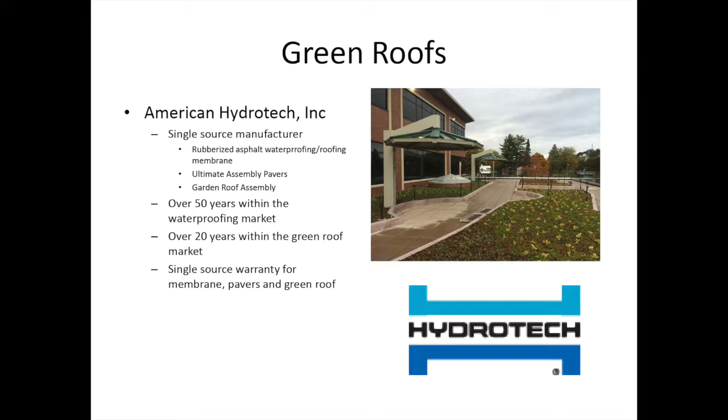Here are some organizations I'm affiliated with. This is who I used to work for, and I still work with them and represent their products because I feel they're top of the line. It's called American Hydrotech. They do waterproofing and roofing, and they've been doing waterproofing for 50 years and green roofs for over 20. I really like this system, these rainwater hogs.

It's a rain barrel, but it's sleeker and more resilient to the elements than just a plastic 55-gallon barrel you'll see. These are really sleek, you can hide them under decks, they don't take up very much room, and they hold 51 gallons. They're pretty cool—I'm going to be putting these on my house in the spring.

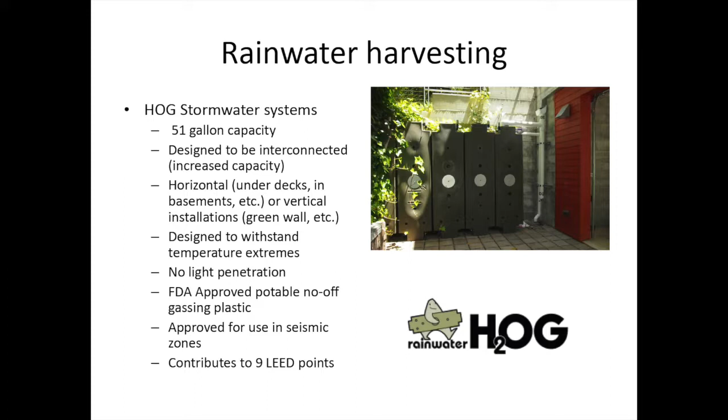We also do rain gardens. This is some images from two that we built this last summer in Traverse City near Kids Creek. We worked with the Traverse City Watershed group down there.

These are two large ones. The first one was at the Grand Traverse Commons site, and it had partially contaminated soils, so they didn't want water infiltrating through there. We actually had to put a membrane down underneath it, so it's more of a pond than a rain garden, but it's functioning as a rain garden—it just does not let the water infiltrate.

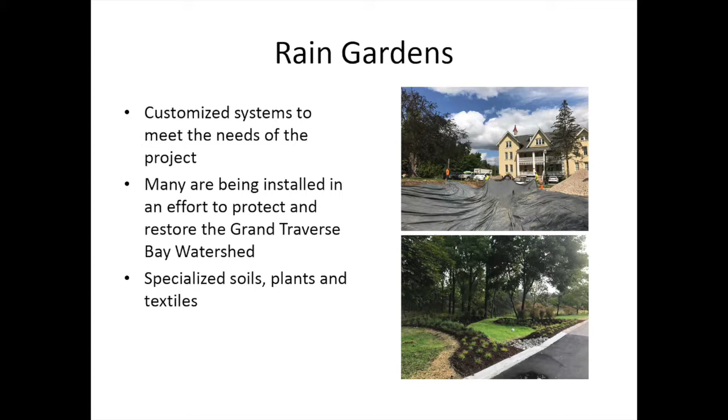The one on the bottom is at another building nearby, same watershed. Overall, a lot of the green roofs happening on Munson's campus and these rain gardens are all protecting Kids Creek, which is a main tributary to West Bay.

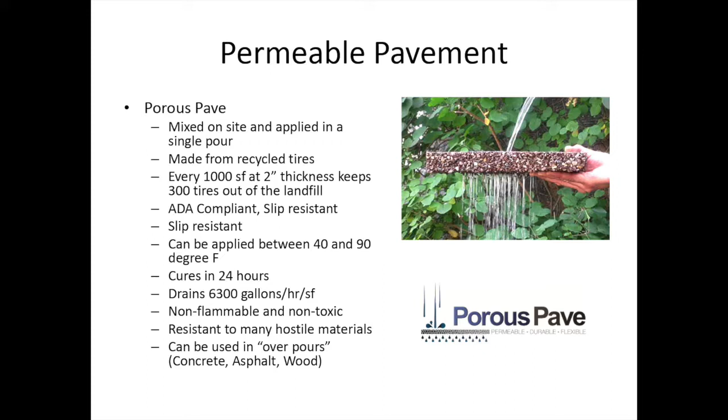Permeable pavement is another thing we get into. This company here is pretty cool—their systems are actually partially made out of recycled tires. Every 1,000 square feet of this product takes 300 tires out of the landfill. You can use this to move water through the system, and again, we're looking at the holistic approach to the roof, or to the site, of managing water.

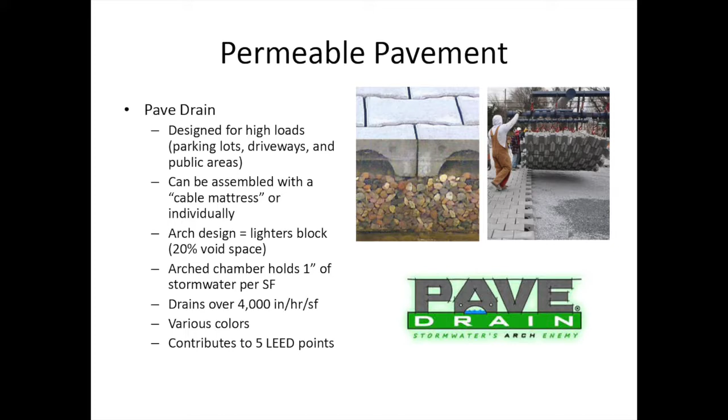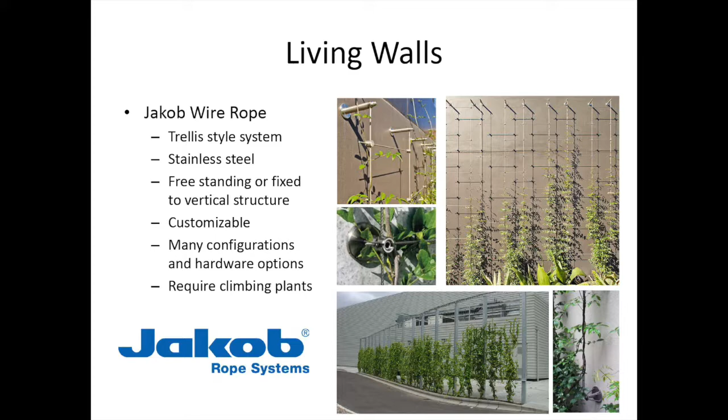Another more heavy-duty system is called pave drain. There are different types of living walls. This one is a trellis system where vines grow up it, and the plants are actually in the soil and the ground. The main difference between that and these is that the soil, or growing media, is actually in the walls for most of these. These are structural walls that would replace your typical concrete block wall—another form of green infrastructure.

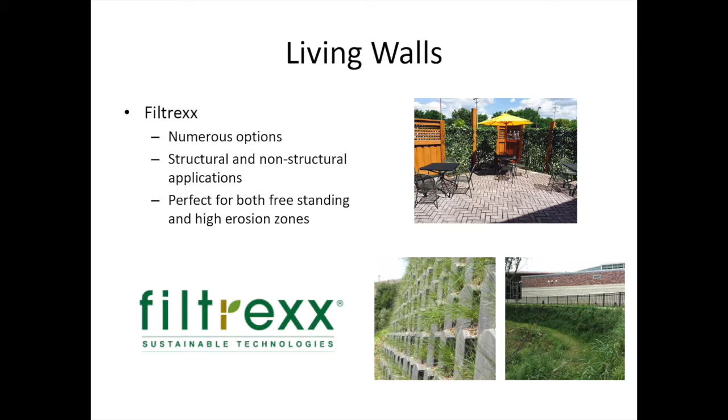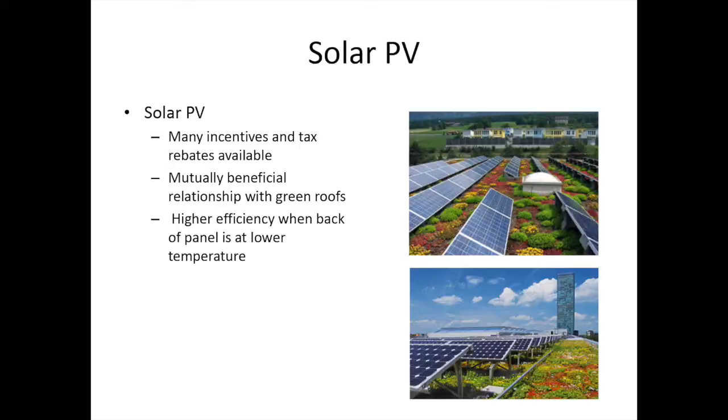We also consult on solar PV. You can see these here—these aren't our jobs, but they're from Germany. There are tests out of Germany and the United States showing solar panels actually producing at higher efficiency when paired with green roofs, because the evaporative cooling effect of the plants cools the back of the solar panel and makes it more efficient. So it's a symbiotic relationship between the two, and overall a good double use of your site.

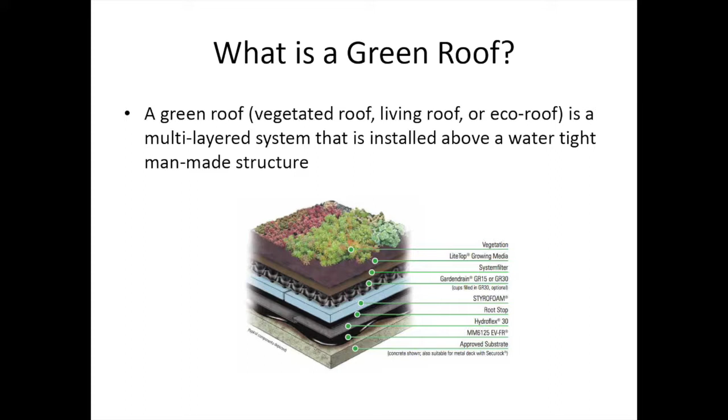So what is a green roof? This is the official, technical definition: a green roof is a vegetated, living, or eco roof, and it is a multi-layered system that is installed above a watertight man-made structure—so basically over waterproofing, and there are many layers that you need to consider.

I'll have this up here so anyone who wants to come look at it after the lights are back on can do so. But basically, the bottom layer is your roof deck. That can be concrete or it can be wood—that's your roof.

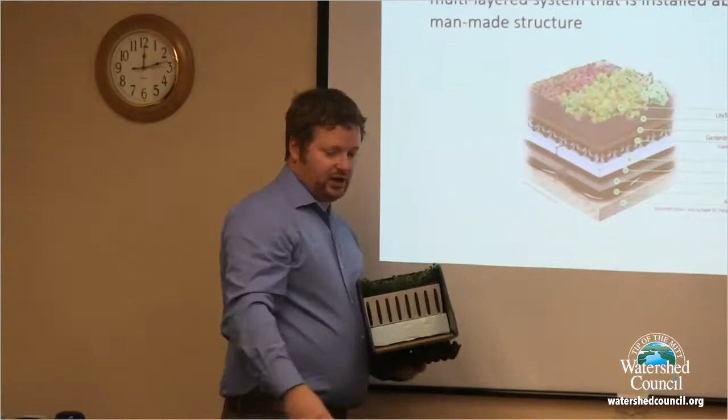And then you have your waterproofing layers, a root barrier, insulation, your drainage board, which is here - this is going to hold water as well as drain water. And then you have a fabric that keeps all of your soil from washing away, and then your plants on top. So it's a lot of layers, but it's all there to mimic the functioning of what you'd get out of the first few feet of soil at grade.

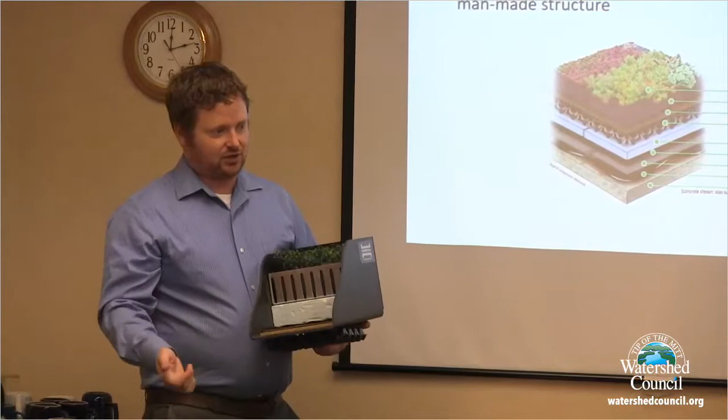It's going to drain, retain water, and support plant and root growth with various pore spaces. There's air within that soil, so the plants and roots can breathe, and it's a really healthy environment. It's an engineered environment, but you're on top of a building, so it has to be engineered to do that. I'll keep this up here, and feel free, we can pull it all apart and check it out afterwards.

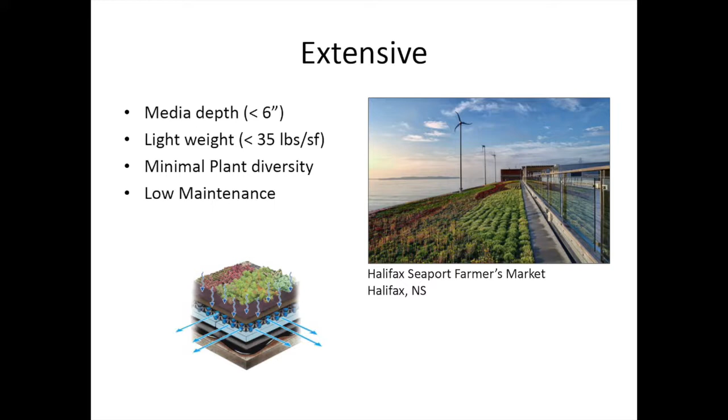So there's different types of green roofs. This one here is known as extensive - it's a shallower roof. There's two main types of green roofs: extensive and intensive. How I always remember that is intensive, it's heavier, so think of more intensive weight, and that's a deeper system. But this one here is a lighter weight system.

It's less than 6 inches of soil or growing media depth. It weighs less than 35 pounds per square foot typically. The plant diversity is minimal, because the root systems of the plants are shallow. So you can't plant a big ornamental grass in 6 inches and expect it to live, because its roots have nowhere to go. That's where you're cutting off the diversity of plants, to anything that can survive in 6 or less inches of soil.

There's a lot there, but it is a more limited palette. It's going to be lower maintenance because of that limited plant palette. You don't have a lot of diversity there, but it is the workhorse of the green roof industry - a big sponge up on the roof managing stormwater, which is one of the number one reasons these things are used.

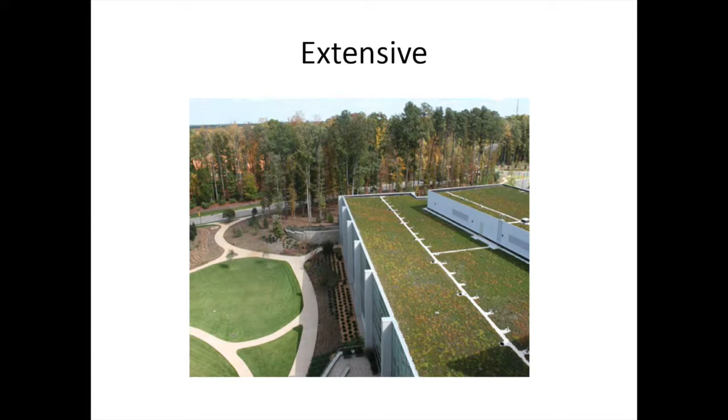This is a large campus, and this is only a fraction of that project. This one's in Cary, North Carolina. They wanted to make sure they had zero runoff from their site, so they're managing anywhere from 40 to 60% of every rainfall on the roof before it even leaves the roof. That's a huge thing for the civil engineers to take into account when designing the overall infrastructure on site. Many communities actually require you to have them now, and this one did it on their own.

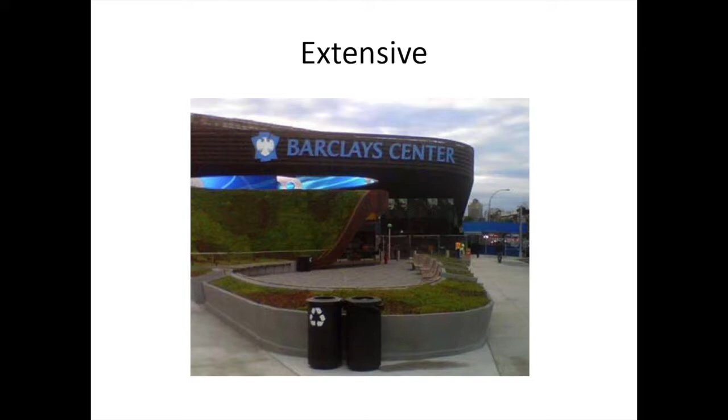This one here is more of an ornamental version of it. This is in Brooklyn, where the Brooklyn Nets play, the Barclays Center. You can see this is an extensive roof on a very steep slope. There's this product here that you can see - it hangs down and holds soil on the rooftop. So you can go at pretty much any angle. This is not something you only need to do on a flat roof. This is a specially engineered system, but it still is extensive, or shallow.

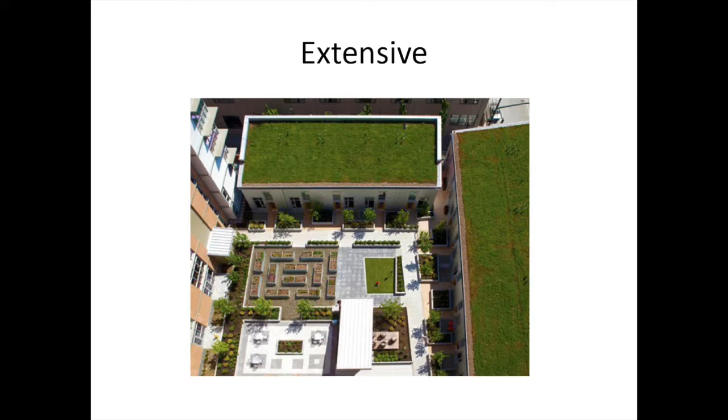Here's one that's another extensive roof up top, intensive down below. This is on maybe the 4th or 7th floor roof of a development - I forget. But this is a project in Portland, and these are all community gardening spaces on the rooftop. This is actually a fire hydrant, and we had to design it so dogs could go up there and use the restroom. We engineered a special soil for where the urine would go down into the waste stream versus into the runoff, and rain barrels collected water they use for the gardening area.

This is a zone that, when this was built, was in a sort of a rougher area - it's Portland, there's not a lot of bad areas, but this was an area where, to get buyers to come in, they needed to provide something special. This is a protected space - a community space, a gathering space, and an otherwise unused rooftop. In the past, there wouldn't have been any interaction with your neighbors at that level.

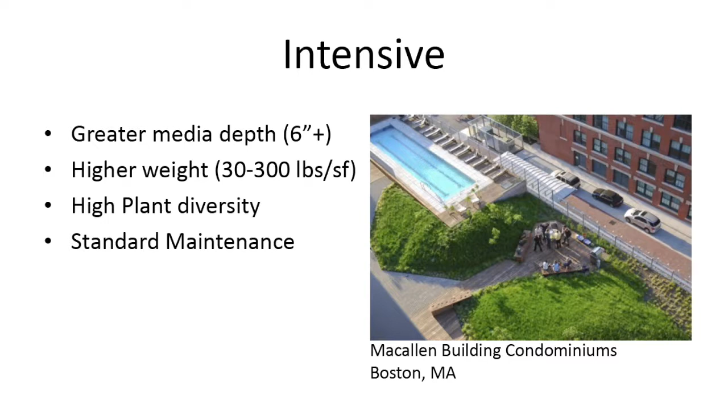This is on the roof again, a lap pool. It's at the same building as the one I showed you in Southie. This is the community space they built on top of their parking garage. They voted to move this into this type of space versus places to park cars - some people don't have cars, so they decided, why not make it a barbecue area and a lap pool and a place you can go outside versus being trapped in your condo all the time.

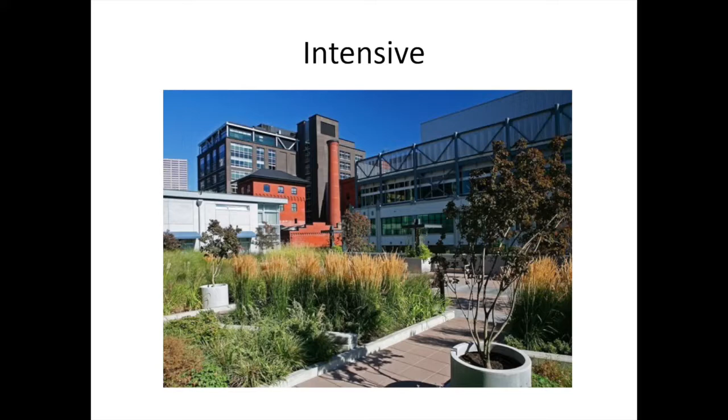So you're going to have a higher diversity of plants and more standard landscape maintenance, similar to what you would have at your home. This here, believe it or not, is the roof. So this is just showing you the diversity of what can happen on the roof with the intensive system.

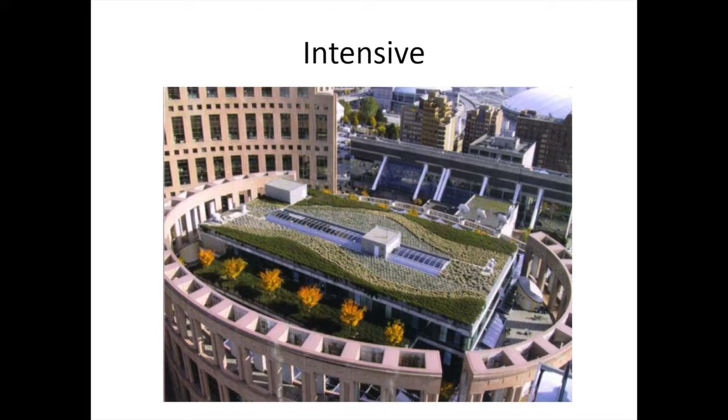This one here is in Vancouver, British Columbia. These are silver maples, and this picture was taken about a decade ago, and now the branches are interwoven - that's how big they are. The trees are huge, and this area right here is about 20,000 square feet, so about a half acre there.

I have a quick question - can you go back one? What about the root systems? How do you prevent the root systems from getting too deep and affecting the structure?

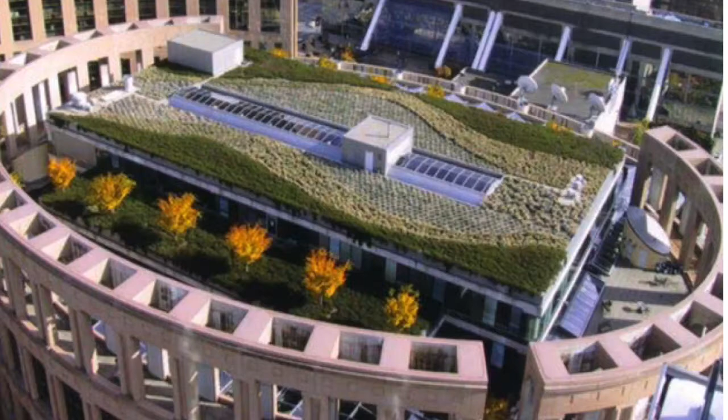Great question, and that's where the root barrier comes in. So you have your waterproofing, and above there you have a root barrier - some type of layer. There are many different types. Most of it's high density polyethylene, or HDPE, and it's tested for up to 2 years typically in a lab for root penetration. Then you put that down over your waterproofing to make sure roots aren't going to go into your waterproofing. Penn State does that testing - they test it against the most aggressive root systems out there, put it in, and see what happens. You have to patiently wait for 2 years, and then you pass the test.

So what are some of those other plants in that? I mean, I see the maples, but these are all different types of grasses.

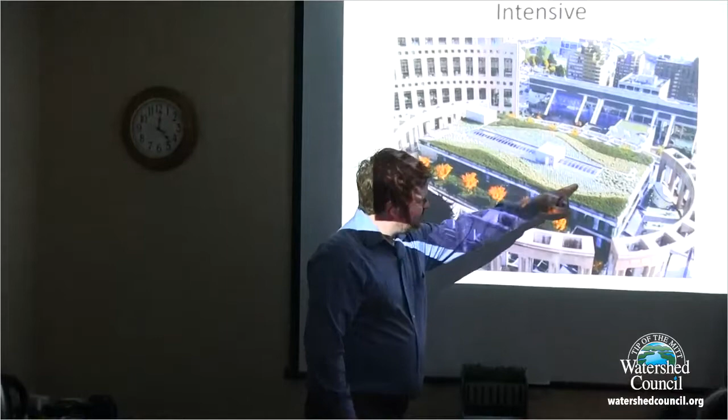I believe this is blue stem right here, and I'm not exactly sure here, but they're all grasses and other types of larger ground cover. I think this is some type of juniper, I believe, I'm not exactly sure, I didn't design this one. This is one I maintained.

I didn't help with the plants on this one. A lot of the prevention also has to do simply with plant selection. You don't select plants that are going to be overly aggressive, like a running bamboo, for instance. You don't use that anywhere.

But clumping bamboo is okay with the right precautions. There is a project though, and again, this is why working with a GRP is important, because some people don't know that.

There was one where we told them, don't use the bamboo. It was a hotel in Philadelphia. Don't use bamboo, we said, but they used it anyway, and within a year the roots had gone through the side of the concrete planter, all the way through it. It was right next to the pool, and it found its way into the pool system and all kinds of stuff. They had to rip it all apart and close the pool in the middle of the summer at a fancy hotel, so it wasn't a very good situation for them.

I'm sorry, I'll back up a little on the technology, I'll pass this around. So this is the garden drain product, and there are various different sizes.

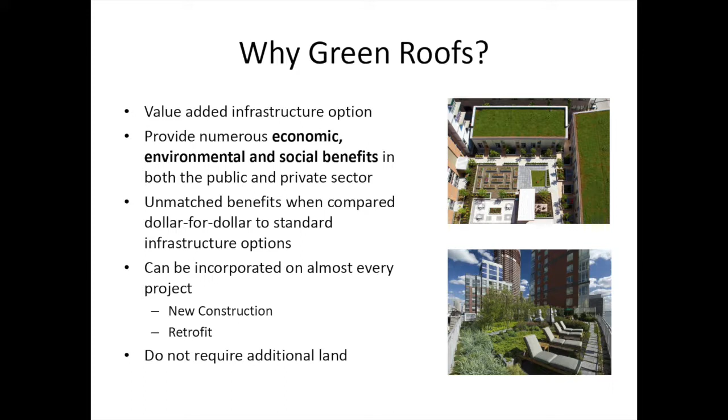There's calculations to show this that can be used in calculating your ROI, or return on investment. You can look at this and ask, what's the benefit of having this break room off of the roof so my employees can go out and have their lunch? What's the productivity you get out of that? There's all kinds of calculations that can be run to help compute that.

Dollar to dollar, when you're comparing it to other infrastructure options - for instance, a pipe underground to take all your stormwater and dump it into the bay - all your dollars are paying for is a pipe to dump water into the bay. But if you put that dollar into a green roof or any other types of green infrastructure, you're getting benefits on multiple sectors in multiple ways for that same expenditure, and it's doing the same thing: managing the water.

It can fit into new and retrofit construction. You can look at a building like this that can barely hold snow load, and you can put more beams up there and figure out whatever needs to happen - retrofits are possible. Sometimes you find projects that are built only 2 stories tall, but they're engineered to hold 10 more stories above them, and you could park a couple semis up there and do whatever you need to do on the roof without having to do anything extra. Some structures are like that.

And they don't require additional land to provide recreational space - that's a huge benefit, a huge reason to use it. Some of the public benefits, things that help your community and your neighbors: they create green collar jobs, a term coined in the industry for educating people to be out there on the ground working on these jobs, doing things that are better for the environment.

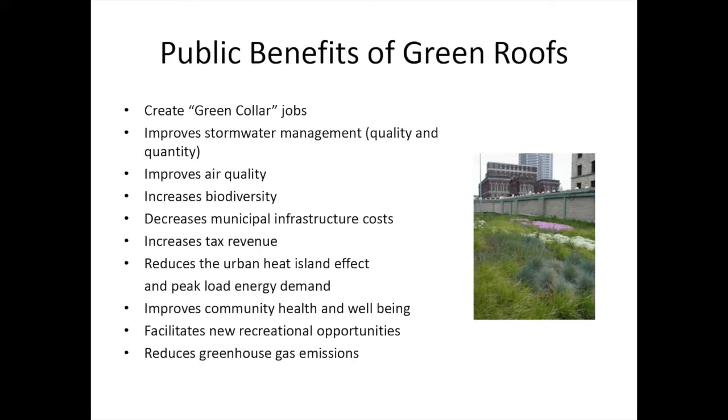The overall municipal infrastructure costs go down in places that are really dense. Even downtown Petoskey, if they have problems with the storm pipe down a certain road because it's 100 years old, if they're maintaining the water on site on a roof, it's not rushing in there and contributing to the potential overflow of the storm system.

Increased tax revenue. These things increase the value of your building, so then the city or the community, the building's worth more money, and that owner is paying higher tax, or that builder or developer can then go out there and sell it for more money. It's about a 10 to 15 percent average, up as high as 25% more per unit in condo developments with this type of infrastructure.

It's going to minimize the urban heat island effect. That's your building heating up and heating the urban area around you. This is reflecting heat or absorbing heat versus it hitting on your membrane and holding there and transferring into your building. You have plants that are evapotranspiring, and I think of it as a force field that's cooling the air around it, and that heat can't get into your building. Even with an insulated roof, you're still going to have some heat transfer holding that membrane in a warmer environment than you would want.

There's new recreational opportunities. You talked about that a little bit, and also it reduces greenhouse gas emissions.

What about snow load? Great question. Snow load is engineered into the structure. So let's say this building, or any building, the engineer has to verify that it can hold the snow. And snow loads have changed in the last 80 years—80 years ago, they didn't exist. Now you do the snow load plus the weight of the green roof. You can't transfer it, you can't say 'I want a green roof instead of a snow load,' because you're still going to get snow. You engineer for snow and the green roof together. Does that answer your question?

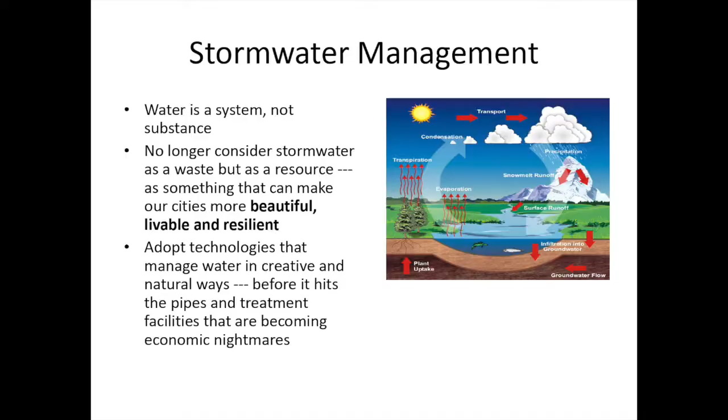Stormwater management: water is a system and not a substance. We're never going to get more water, it's not falling out of the atmosphere—all the water we have on the planet is here now. So it's moving in a cycle, and these are helping replace a surface that used to be permeable.

We're looking at various different technologies to help create these—and I am skipping some stuff because time's short today. So we're restoring nature's ability to capture water where it falls. That's a big thing, and it's capable of substituting or offsetting natural ecosystems.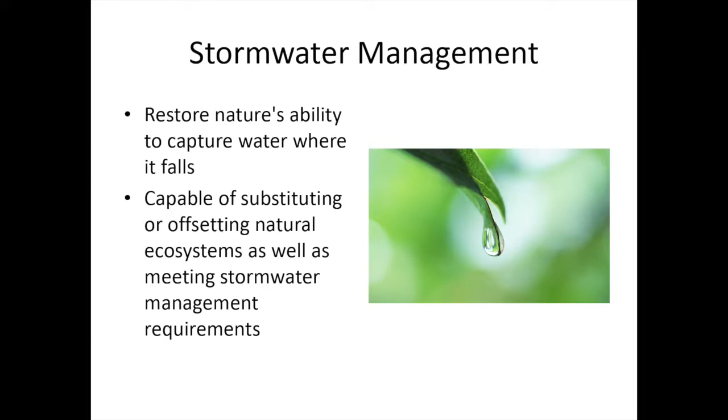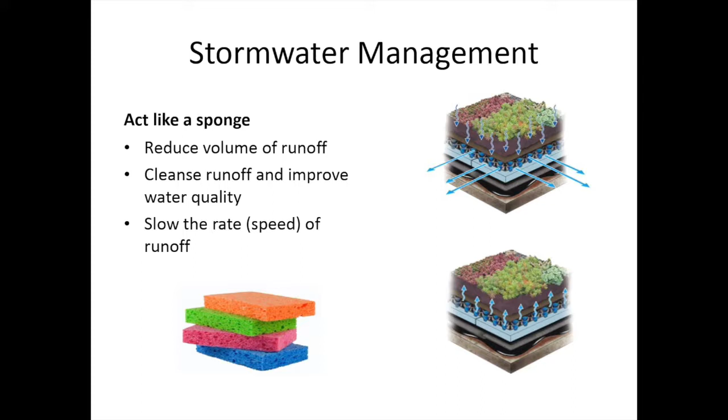I've had people argue, 'well, you're doing a development, you're putting an extensive roof up there, and this used to be a meadow or something like that.' Yes, but it's better than not having that on the rooftop. It's like what I usually say—I'm not the one who owns the property, so I'm just trying to help make it greener. It's acting like a sponge, and that's a good way to think about it.

Think of a dry sponge, and you put it under a tap, and you're holding it there until it's saturated, and right when it's saturated, it starts dripping out of the sponge. That's exactly how a green roof works.

There's a capacity to hold it, and once it's ready, that's delay. So when you start putting water in there, the delay of when it starts to drip is what civil engineers are after, because that delays the water from flushing with all the other water out into the bay. That's typically about 2 hours for a drop that hits it to actually hit a drain once it's saturated. That's the type of data engineers are looking for, and we can help with that. So it reduces the volume, cleanses the runoff, improves water quality, and slows the rate that it's leaving the roof.

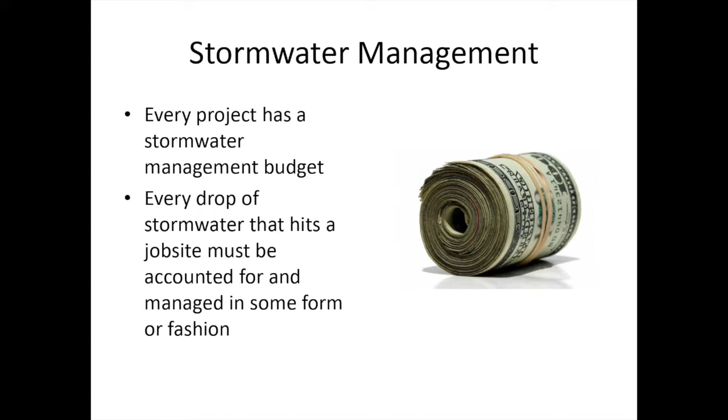Every project has a stormwater budget. If you're building a new house, you're paying somebody, be it your builder, the landscape architect, the civil engineer, or the developers. Somebody planned to put the water that hits your roof and driveway somewhere. So even the most basic home is paying for some kind of stormwater management plan. It's required by every municipality and every township.

So with green roofs, you can actually take that budget and help roll it into a greener technology. I've done that many times, where instead of paying an engineer to design big pipes underground at a new shopping mall, they could put that same money onto the roof and get all those other benefits we've talked about. Every drop, you have to manage it, and you have to show how you're going to manage it. That brings us to the increased tax base.

That's important. Urban heat island effect. This is the Chicago City Hall, and it's a demonstration roof. This is one of the first ones in Chicago that helped really kickstart the movement. It's about 15 or 18 years old now, but it's really a very diverse roof.

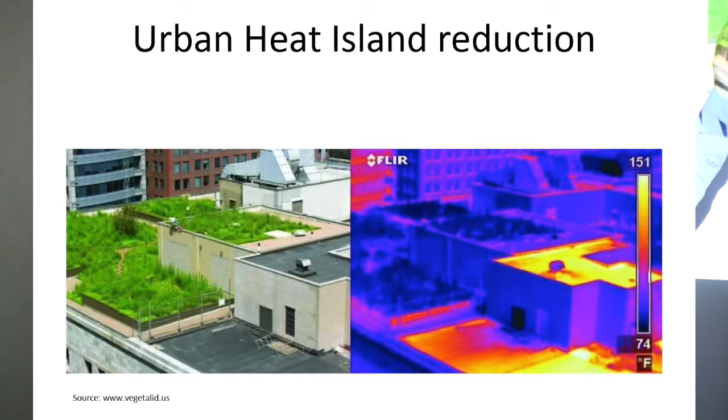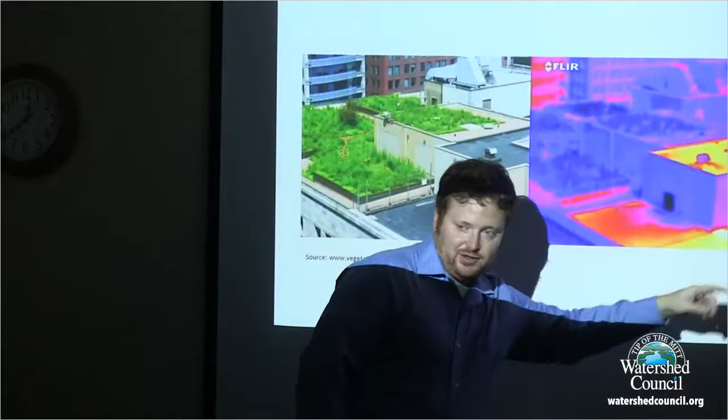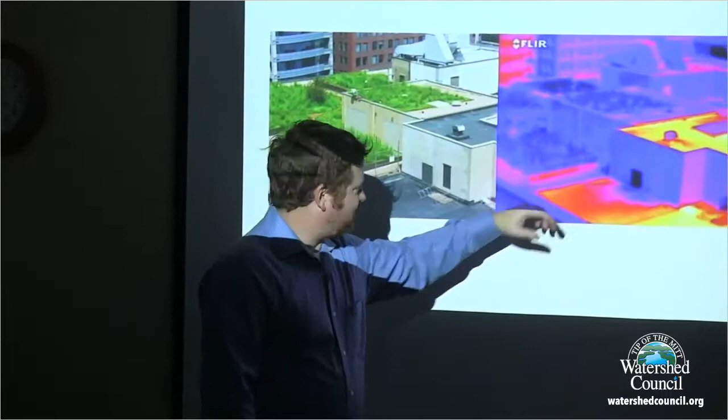It's on 50% of the roof, and you can read all the data about the historic stormwater management and the reduction of air conditioning requirements on that side of the building. But here it's very clear for everybody to see. This is a FLIR image of the site, and you can see where the green roof is dark blue, down in the 74-degree range. Over here where it's closer to the other materials it's not as hot. But this white wall, the reflection of that, is burning hot, 151 degrees.

So by blasting your membrane with that heat, you're weakening it, which increases the likelihood you'll have to replace it. I always think about it as a paper clip. If you have a paper clip and you straighten it out and start bending it, that's one day, that's your membrane heating up. You bend it back, that's it cooling off. And eventually you're going to break your paper clip. That's the same thing happening in your membrane, heating up and cooling down, heating up and cooling down. It might take 12 years, but you're going to get a crack in your membrane and you're going to get leaks. So green roofs protect it, because it's underneath and doesn't get that UV ray.

So private benefits, how is it going to benefit you if you put one of these on your structure?

Aesthetic improvements, it's going to look better. That's a big reason a lot of the ones I do on residential properties, they like how it looks, that's their number one reason. But then they also benefit from the stormwater management or the cooling benefits that happen there. The energy savings is big too, because on most residential homes, the evaporative cooling effect from those plants keeps the heat of the day out of your building. That either helps you, if you have central air, not have to turn it on as much, or if you don't, you might be able to avoid central air altogether if you do it right. That's an energy savings there.

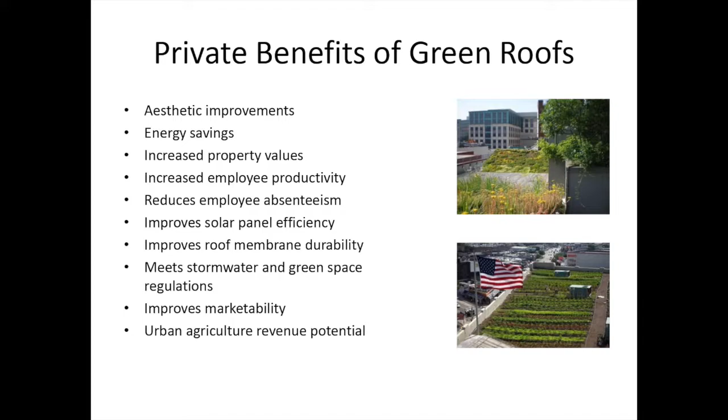You're increasing the value of your property by having this, because if it's a commercial building and you have a green roof, you can say you'll likely never have to replace your waterproofing membrane. Where if you buy a commercial building, one of the things you'll figure is, okay, 10 years down the road, I'm going to have to spend $100,000 or whatever it is to replace my membrane. That's part of your calculations as a buyer, so that's another benefit.

Increased employee productivity and reduced absenteeism. Absenteeism is proven, there's tests and data on all of that. We talked about the solar panel, we talked about the membrane durability.

Meeting stormwater and green space regulations - places like Denver just passed this. Any new commercial building over a certain square footage has to have green roofs or solar panels. So that's a mandate, it's not a choice. San Francisco has a similar thing, and so does Toronto, and various other cities have different levels. But those three cities are the first ones to mandate it - there's no choice. There's a lot of fight from the developer sector and manufacturing sector, but people are holding strong because those people are contributing huge roof space to all of our infrastructure, and it's costing everyone money.

So now you can use this to meet your stormwater requirements for your site.

Improves marketability. That's sort of a greenwashing one, but if you have a business and you have an awning with grass growing on it, people are going to be like, well, that's cool, and they might walk into your shop.

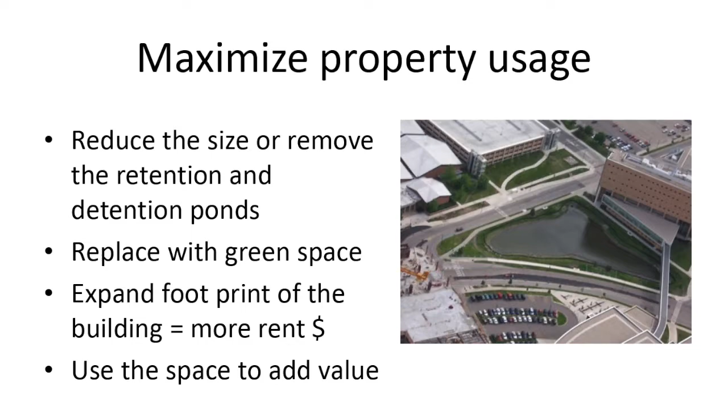Maximize your property usage - these roofs will hold a good percentage of your rainfall. This is a campus, I forget which one, down in the southeast part of the country. But this huge pond - all these buildings and parking lots are running to that pond, capturing the water there. If all those buildings had green roofs, they could put another building there, or have a community center for their students, or have it as green space. But instead they have all this water rushing in there, and it's really a waste of real estate. So if you can manage all that water up top, you can add more value to your property.

So there's policy work that's been done. I, as a policy educator for the industry, actually helped create these two documents. They're available online, and if you grab my card and ask me to send them to you, I can send them to you in PDF.

This one's about 150 pages, and it goes through every city and the incentives and guidelines and requirements they have for green roofs. Washington D.C. will give you $12 a square foot towards your green roof, because it's cheaper for them to pay for it, or pay part of it, than it is to fix the pipes underground. That water leaving your site would cost them more than $12, so they'd rather give you the money and make it green, and then that water is off their budget and their management requirements.

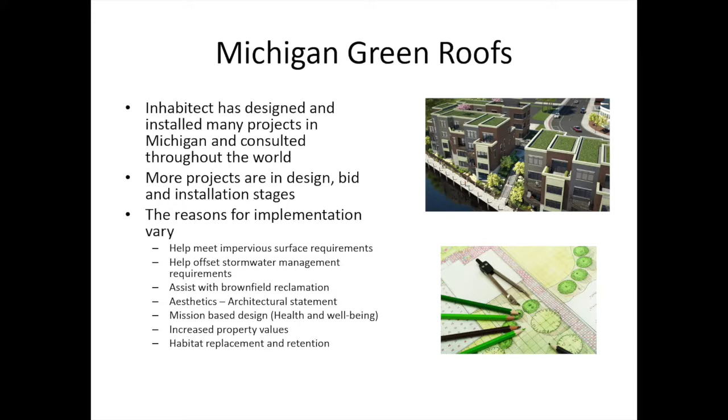We talked about that—there's federal recognition. The EPA looks at these and has stamped on them. I'm waiting for the day they say it's a federal mandate; that would be nice for the industry, but for our infrastructure too. I'm not just looking to make money off of it. It'd be a mandate that any building of a certain size has to do this—that would be a dream.

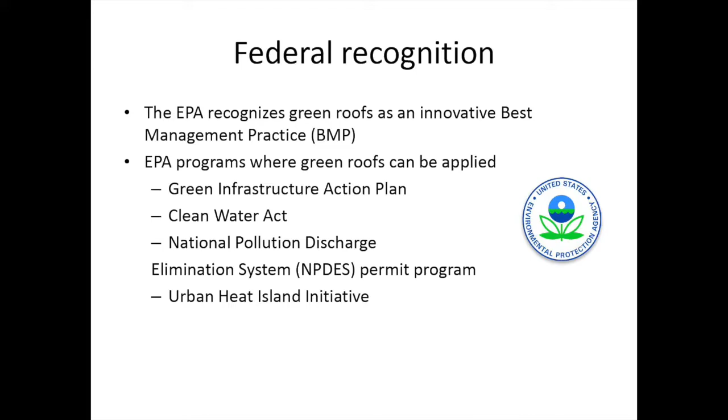But the programs that are talking about green roofs are the Green Infrastructure Action Plan, the Clean Water Act, the National Pollution Discharge Elimination System, and the Urban Heat Island Initiative. Those are all things within the EPA that call out green roofs from the federal level. I don't know how our current administration has changed that, but time will tell. These are all documented things that help people like myself or companies like me talk to architects and policymakers in regions and say, look, the EPA is saying it's okay, so they'll work within your program.

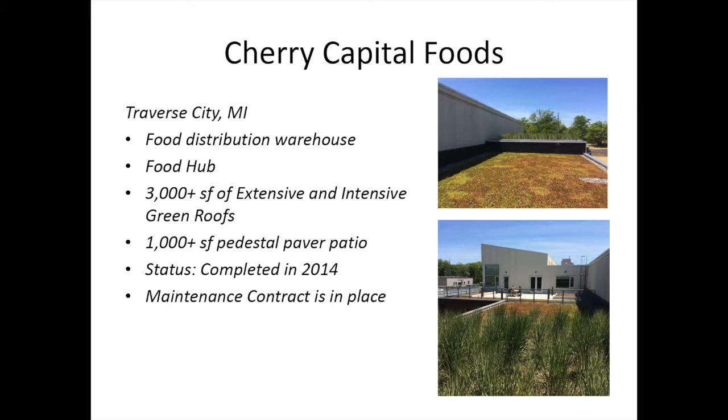So, we're getting towards the end, and I'll just go through some regional examples real quick. Cherry Capital Foods—we did that in 2014. It's a pretty cool place if you've never been. It's a food distribution warehouse that collects from all different small farmers and small food producers, and underneath this green roof are all these little offices, like a kombucha maker, a cheese maker, and a lot of different things going on there. When they produce their food, they just carry it across the hall, and there's the distribution right there. So it's a great spot.

And Dave, real quick—that's another real thing. Talk about employee satisfaction and employee retention. If you have a business like that, it's a great example of those benefits. We go there to do maintenance once in a while on that roof, and there are always employees out there, every day, either working on sales, working on some project, or just having lunch and socializing. So it adds immensely to happy people.

Yeah, and here too, these two beds—this is earlier in the spring, before anything's showing—but those are deep areas that they created as garden spaces for their own herbs. So their employees have tomatoes growing or lettuce growing, and they can go out and water it and pick it for a salad or whatever it is. So the employees can actually have a garden if they want.

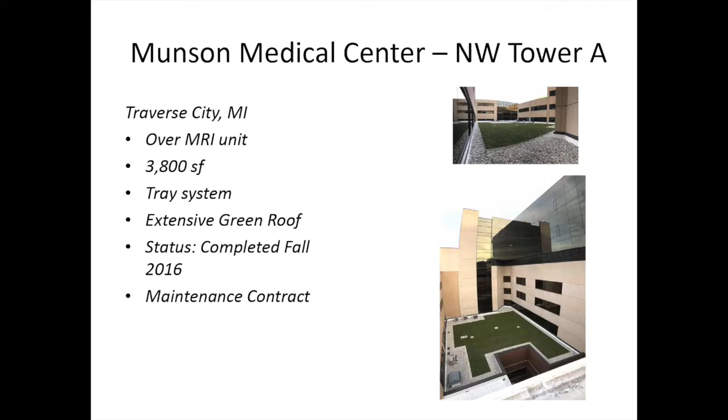Yeah, they're there. And here's another one at Munson. This is another one. They centered on this because all the runoff from the surrounding building. This will help, again, slow water down from hitting that creek. We also did, there's a lot more coming up in that area.

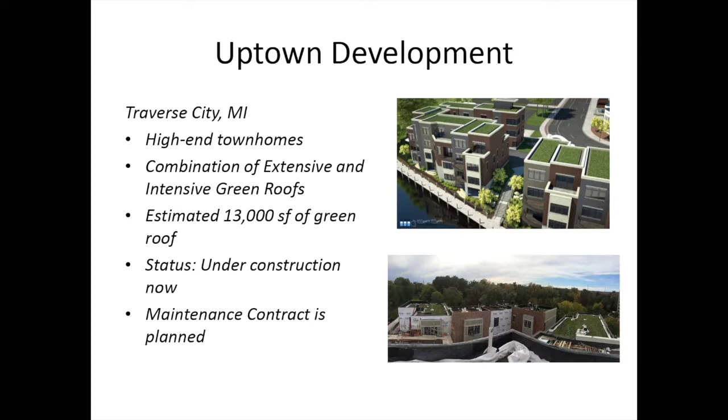This one is a very dense development. It's right on the Boardman River, and some people hate it. It's not the prettiest development, I'll agree, but they had the right to build there, so I can't tell them - that's beyond my job to say who can build what where - but they did green roofs. All the water that's hitting there, they're slowing the majority down before it hits the water. They have a rain garden where the water goes to help slow it down before it hits there. In my opinion, this was a gravel parking lot before.

It used to be a dump. The whole reason was, when they were digging for the basements, they were digging out Model A's and stuff, and old women's shoes with the real points and lace up, and ink wells - it was cool. I'm a treasure hunter kind of guy, so it was fun. I got a whiskey bottle from 1860, fully intact. So it was a garbage dump, and they removed all of that. It was a brownfield site, and now they're getting something out of that property. So I'm for this type of work.

It's over 13,000 square foot of vegetative roof. Some of them have elevators that pop up, and they have gardens and everything. Not the low affordable housing type situation. So it was a dump next to the Boardman River, and it used to be a bus station.

After it was a dump - there was a big fire in Traverse City in the late 1800s, and it was also a dump, and they basically pushed a bunch of burnt stuff and garbage and threw it on the river and covered it. Then there was the bus depot there for decades, and then it was a brownfield site. So now it's 16 high-end homes and taxpayers densely packed into this little acre and a half site, but now they have 16 well-off people paying taxes. So to me it's good - they cleaned it up and eliminated the runoff into the river.

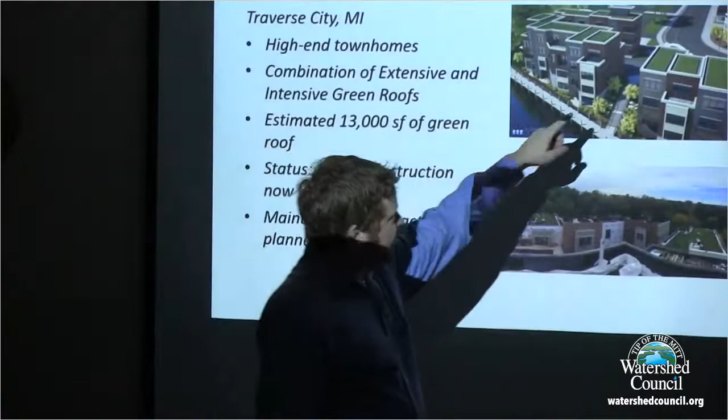And then they also created this living edge, and they're adding this boardwalk. This is Pine Street right here, J&S is right down the block - the little hamburger place downtown on Front Street. So they actually helped pay for this development, also put a bridge over the river to connect two neighborhoods that weren't connected. So this development did a lot of good things, and part of their sale to the community and to get it signed off was vegetative roofs.

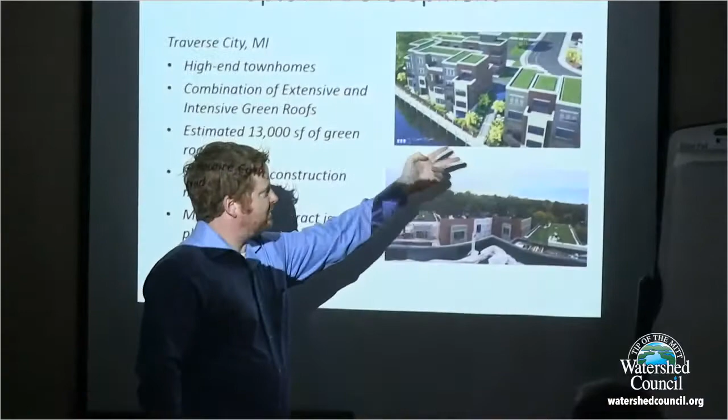Developments on the river are also helping pay for a greater Traverse City urban river boardwalk, so connectivity right here - that was part of it. Overall they did what they could to be more sensitive to the neighbors, and part of that was the green roof. Then I do small little educational ones.

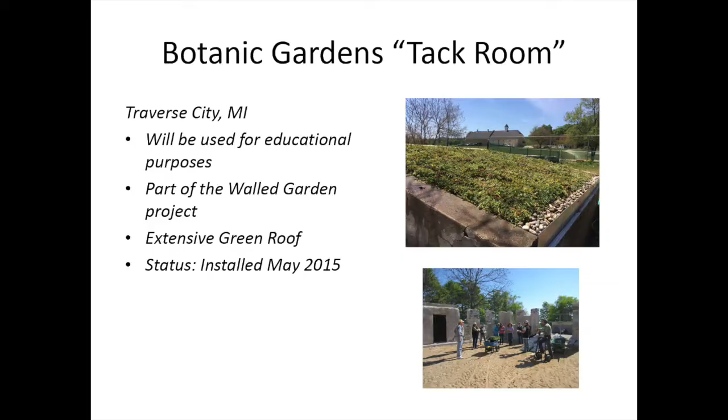This is at the barns in Traverse City, on the old state hospital grounds. This used to be a horse barn that for some reason they tore down back in the 40s or 50s. It's a beautiful old thing, but they tore down this beautiful hay barn.

But this was the tack room right here, and I worked with the Botanic Gardens down there, the Master Gardeners group, and we did a little demonstration green roof to teach people about it. Inside that walled garden is a wedding venue. It's beautiful, and they show off the green roof and the technology so people can come up and actually touch it and learn about it.

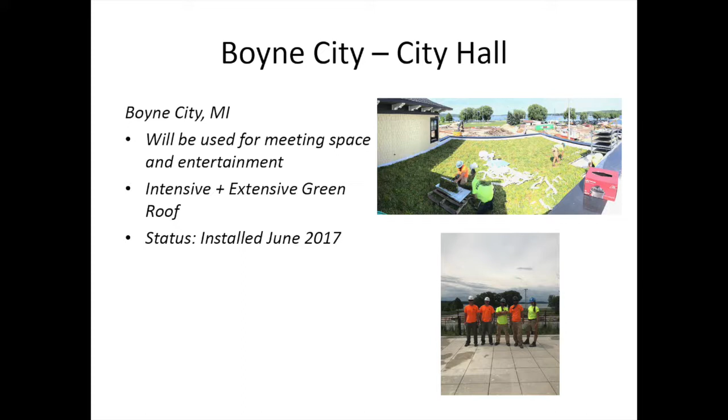This is right in your neighborhood, close here, Boyne City Hall. We did that one. There's a meeting area right out of the main chambers of City Hall, or I think it's the City Hall group that will be there. We did that last summer.

And those are all sedums? Yes, all different types. They put down a sedum carpet, it's called, about 13 to 15 different varieties, and about 6 survive. You put it down with 13 or more, and then they figure out which ones will grow there, depending on the microclimate. So you get different ones growing on one part of the slope and a different one elsewhere. It's sort of a shotgun approach, meaning you see what happens and what's going to be there. And these are all adapted, non-invasive varieties, so there's sensitivity to that - they'll grow here, but they're not going to take over the woods or something.

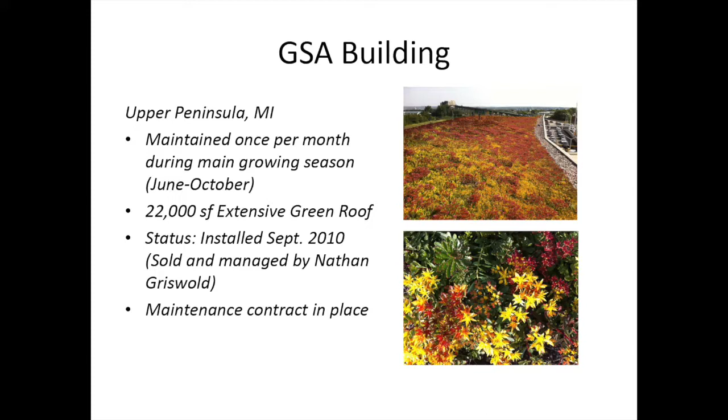The crazy things my job gets me into - I had to write letters to the federal government explaining what was going on, and they turned those lights off because they invested a lot of money into this roof. This is actually the second time they did this roof. Originally, a different company sold it and didn't do it right, so it was failing. They ripped it all off and did it a second time. So they've done it twice. This is a really large one that you can see. And here's a quick story - to get in there, you have to have security clearance and go through all kinds of checks to get in there. It's interesting.

This is a private home in Honor, Michigan. This one was primarily for aesthetics. Right around this corner is a hot tub overlooking Lake Michigan. This is his office, so he wanted that, and they benefit from the heating and cooling benefit, the stormwater benefit, and all that. But they bought it because they wanted a green roof and wanted to see it.

Can you give a cost? Yeah, that one was about, in addition to the waterproofing, this one cost in the neighborhood of about $16 a square foot installed. But that can go down based on size - that's for 1,000 square feet, so if you go larger it can push down towards $12-14. But if you go smaller, like 1,000 square feet is really right on the hump where the price starts to increase. If it's 200 square feet, you're gonna pay like $24, because a lot of that's mobilization and getting material shipped and all that kind of stuff.

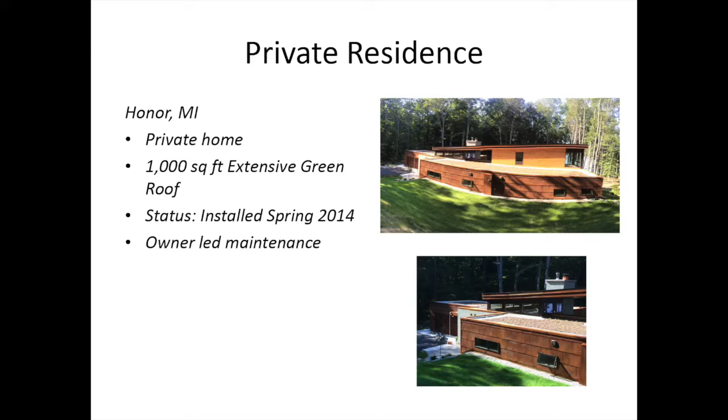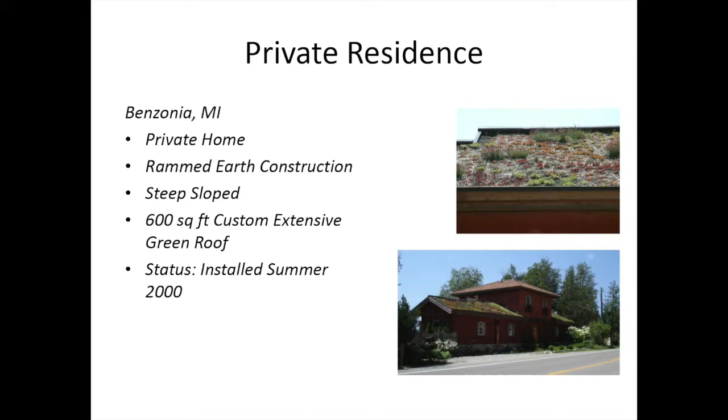Very open. This is the first one I ever did, way back in 2000, so I guess it's a little over 15 years officially, but this is the first one I did while I was in college. It's on Crystal Lake in Benzonia, Michigan. That's actually a rammed earth home - there's not any insulation in the house other than that. It's about 18-inch thick walls of mud and straw. No corners, it's all rounded. So that was the first one I ever did.

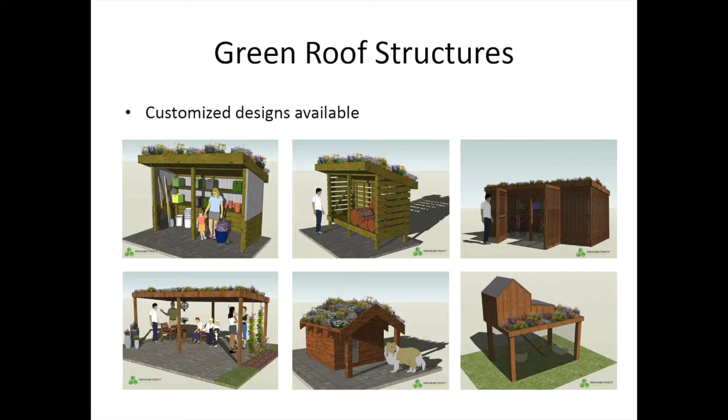We could do these cool little structures too. I have a wood shed at my house like this, and I put a door on it, and my mom and stepfather have a wood shed with it, and a dog house with it. So it doesn't need to be big - if you want one just to show people, or because they're cool, you can do small ones. I got a chicken coop. He's got a chicken coop at his house.